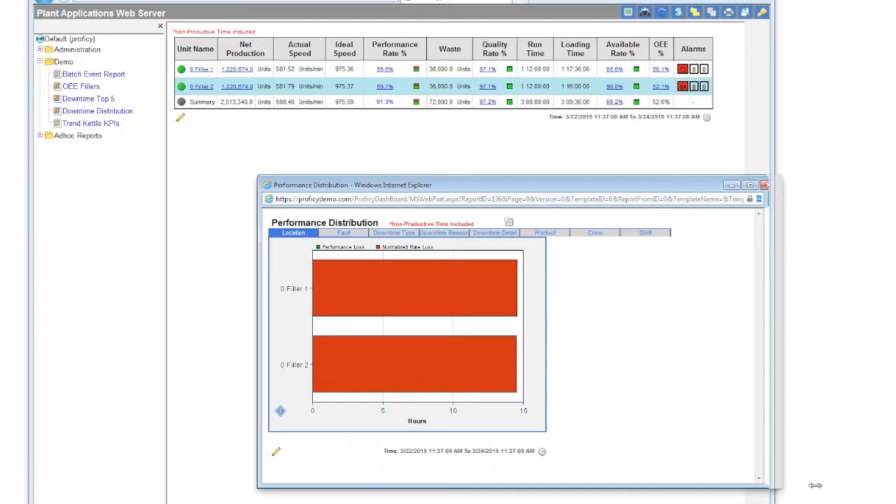We are making continuous improvement with the investments that we do to improve the process. The data is constantly changing, people are asking for different ways to visualize it with reports, and they're also asking for more and more data. We're always getting more and more instruments to collect more data.

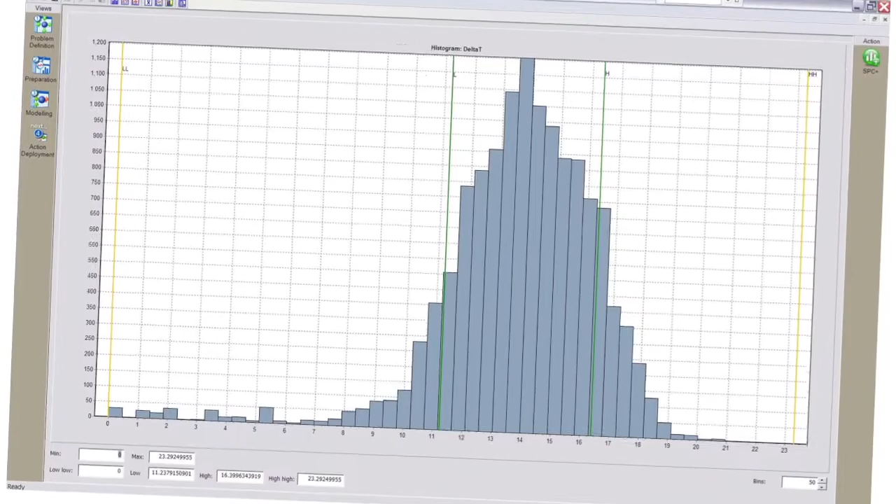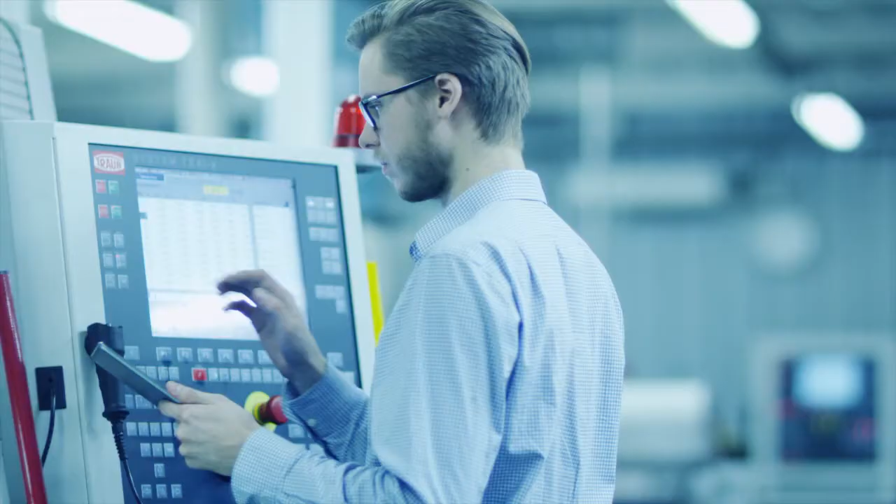It really helps overall understanding of the process. It helps for investigation purposes. If something should be off, we can actually find root cause a lot easier. The software helps communicate what's going on and what the data is to the right people in our facility. The software can definitely make a difference in manufacturing, your efficiency, effectiveness in whatever product you're making.

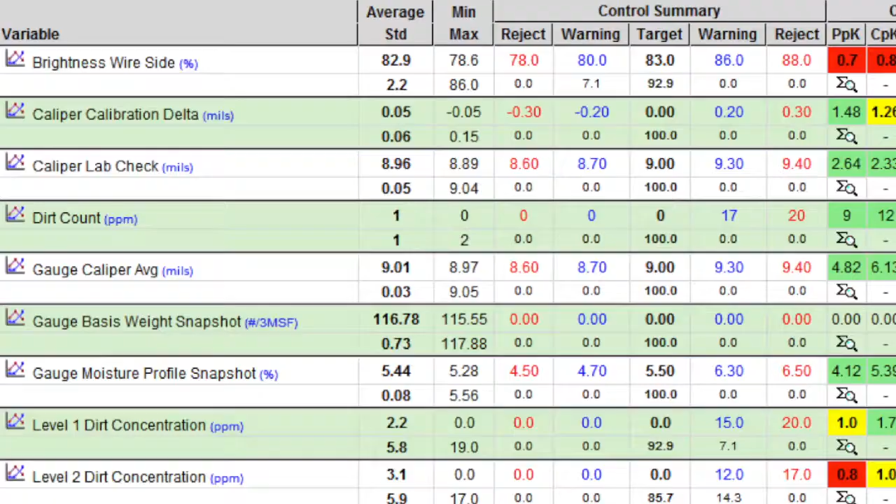The role IT plays in manufacturing at Neenah Paper, we try to support the business as much as we can. We're constantly asking them, what software systems can we improve on to make their job easier? What type of data do they need? How do they want to see this data? We're looking for continuous improvement.

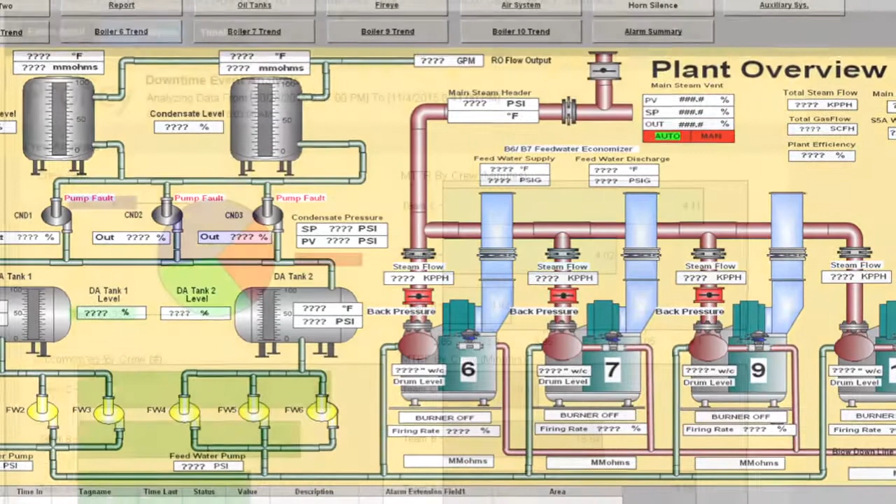We're seeing a lot of customers expecting much more analytical data, and not just the information so that they can make a decision, but the information and a recommendation for a course of action to make a correction. Having all the data and being able to review it has definitely helped with productivity. We've been able to review that data and propose process changes to get increased yield.

The SCADA system can watch your whole operation every second. That's what we make our business decisions off of. That's what we make our continuous improvement projects based off of. Our team is constantly querying the historian database and looking through trends.

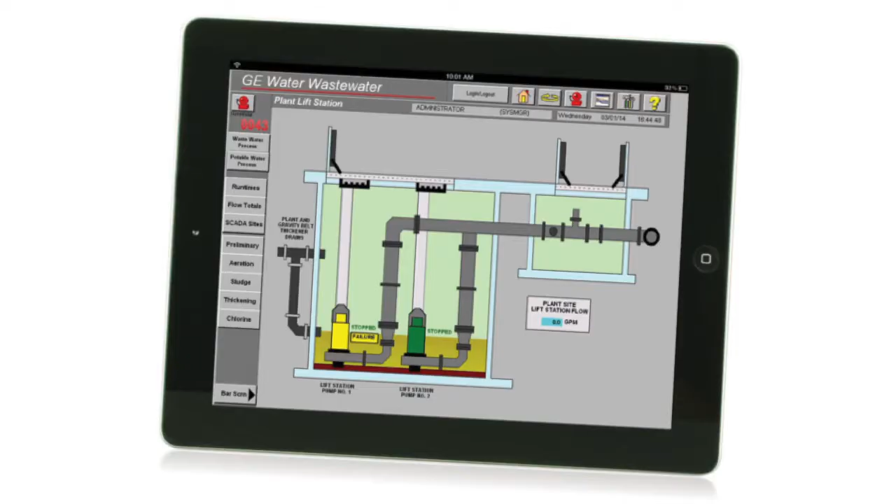The analytical data is going to be going into intelligent databases where this data will be manipulated, and decisions or recommendations will be provided for the users. It's not just a case of monitoring a plant anymore. It's identifying key indicators that are outside the norm and warning operators about it.

Expecting that 15 to 20% improvement with real good automation, and they'll end up getting more if they do it right. I've seen things, and I have one customer who looked at a 1% OEE improvement worth $200,000 a year to the bottom line. So you don't have to buy any more capital. It's just fixing a couple things, very simply, drove $200,000 of profitability back to the company.

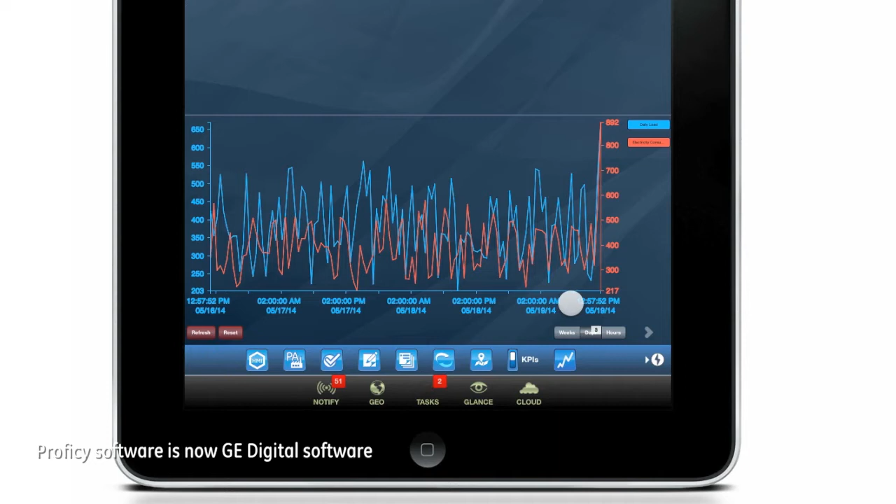The Proficy platform speaks to customers when they see it demonstrated, because they see that's what we've been looking for. We knew the type of data that we wanted to see. We just haven't had it in a way that could be automated, bring in manual data from labs, from the ERP system, bring it all into one spot so that we can now finally analyze all that data and not have it in disparate paper trails across the facility.